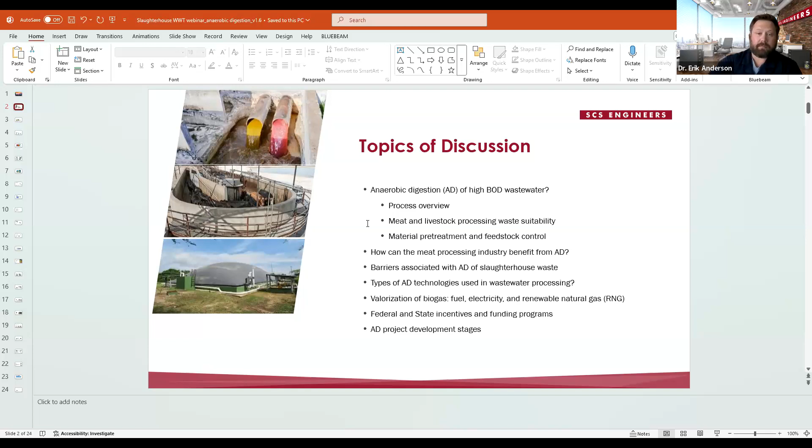First slide I have, anaerobic digestion. What is it? Let's just define it right out of the gate as a biological process where microorganisms break down organic matter. They do this without any oxygen present. It's inhibiting in this case, and the goal is that the organic matter in liquid phase turns into a gas.

This gas is very rich in methane and CO2. That gas is driven out of the liquid phase and above the liquid where it's captured. We're covering these systems so that there's no air or oxygen present. That gas is collected, pumped out of the system, and utilized some way for energy.

One thing to define here is the biological oxygen demand. This is a very common metric for wastewater treatment, and it ultimately says it's a measure of how much oxygen is consumed by microorganisms to decompose organic matter. It's a great measure of, A, what's your concentration of waste in your liquid stream, and there's also a measure of what's the biogas potential in that liquid stream.

There's lots of waste in this, pollutants that can't be converted to organic matter. They can't be converted to gas. It's either organic in nature but recalcitrant and can't be broken down, or it's inert but can be oxidized. So it's very critical to define what's in there and what's actually of value.

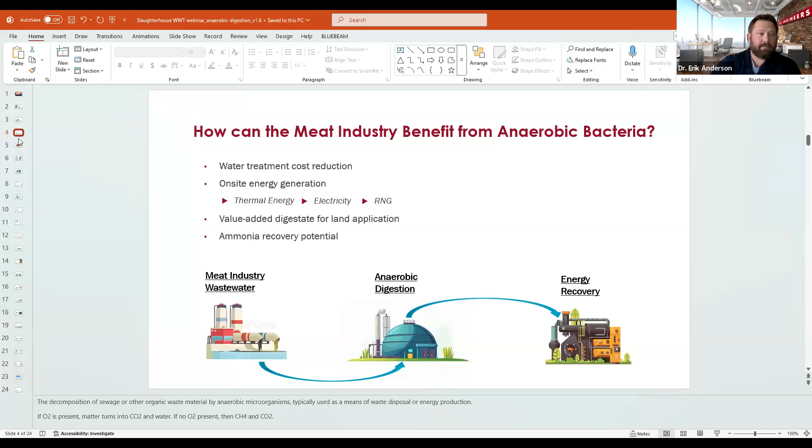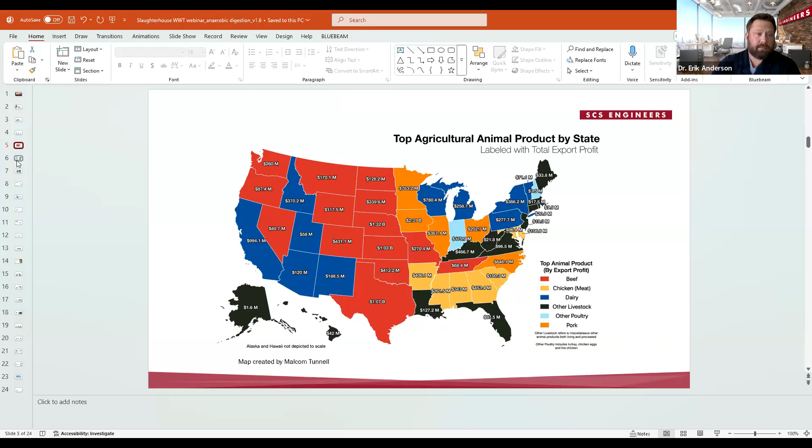Common meat processing streams. When we talk about the meat processing industry and livestock, there's a lot of different industries this topic touches on. It's any meat or processing industry dealing with a lot of meat, high protein, blood, protein derivatives, and high oil content from rendering operations. You can categorize into waste meat processing wastewater, like the wash-down water, the DAF or dissolved air flotation unit effluent, or in many cases the DAF solids that come off. If a system already had a DAF unit, depending on the chemicals used, we could retrofit in front of or behind that unit to target one of those streams. Both materials are prime organic concentrated streams that can be fed and broken down by anaerobic bacteria.

Paunch material - I've worked with facilities that had offtake agreements for their paunch material but were interested in processing it in a digester. That material is very thick and can be tough to deal with. It needs to be ground, pulverized, and processed in a way that can be fed into a digester.

Animal manures are obviously very popular, each bringing their own uniqueness in terms of design and processing. Chicken and pig manure are heavier in protein concentration and higher in nitrogen, which leads to ammonia, but dairy and beef cows can have the same issue. Waste oil collection, rendering operations, dead cow mortalities, meat and bone meal products, grease, and waste traps are all high in fats, oils, and grease. Although there's a limit to how much can be blended into a feedstock, it is very beneficial - we'll talk about the reasons for that later. Any industry with a high oil protein base in its processing, like food industries dealing with fryer material and fryer grease, often have a high BOD wastewater that needs to be dealt with.

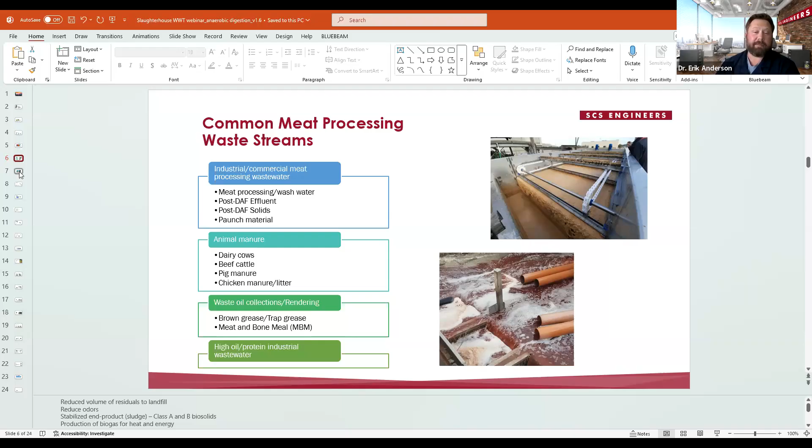To break it down, the total solids is everything that's not water. But within that solid content, there's degrees of usefulness. There's an inert portion that does not contribute to the biogas at all. It's mostly inorganic, can be organic, things like grit, dirt, windswept sand that's blown into fields or on farm manure, what have you.

Of the volatile components, there's total volatile solids, and then there's a portion within that called bioavailable volatile solids. What that means is not all organic material can be broken down in the time necessary for a digester to operate. That material can be cellulosic, bonds that aren't broken down within the design time, and they move through the process rather inertly.

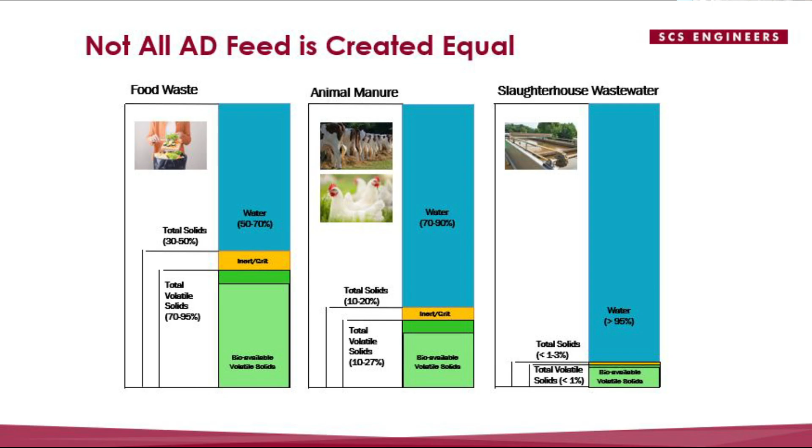These things, without design intention, can be problematic. They can be inhibiting agents, they can slow your production if not kill it, if left unchecked. The other major characteristic is the low total solid content, and the higher discharge temperatures. This is a very common industry characteristic of a lot of slaughterhouses, a lot of meat processing, that their wastewater might come out above 100 degrees Fahrenheit.

That can be a huge benefit. With that high temperature, you can get a high soluble degree of what's called chemical oxygen demand, or biological oxygen demand, BOD, that we talked about. This is essentially a measure of the amount of oxidizable material in solution.

The low inert content, you can see on the graph here that along with low total solids is a very low percentage of inert character, because the material comes from essentially cow organic matter, stomachs, meat and blood. There's not a whole lot of bone, not a whole lot of grit. These are systems contained within factories that are usually well regulated, so the only inorganic material would be from the animal processing plants themselves.

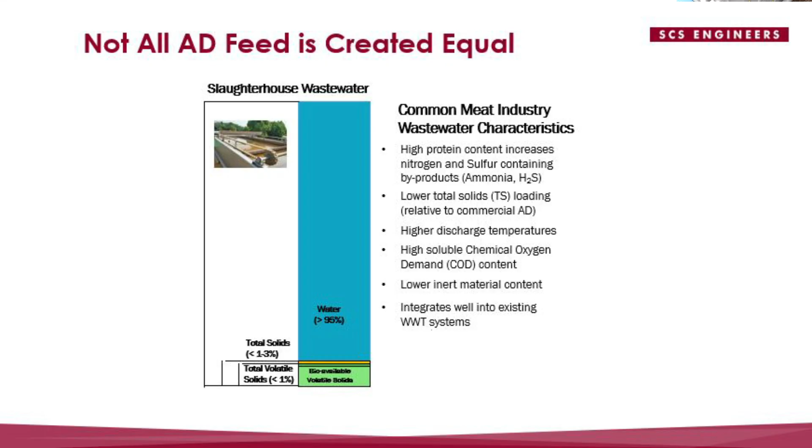Next are the barriers associated with the AD material. We can't talk about the positives without talking about the negatives. The high protein feed we talked about comes with negatives.

The ammonia concentration, if not dealt with, if it rises above a certain limit in steady state conditions—meaning the concentration in the digester at any one time rises above a certain threshold—the bacteria become less active, to a point where they become completely inactive. It's called inhibition.

The sulfur that comes in with the protein can also turn into hydrogen sulfide. Hydrogen sulfide is another inhibitory agent, both in the gas phase to the bacteria and in the liquid, but it also needs to be dealt with in the gas recovery stage. So once you pull that biogas out of the system, it needs to be removed before any processing, since it damages equipment for electricity generation, boilers, or RNG.

Salt concentrations can be a difficult issue and need to be addressed on a site-specific basis. Salt is used a lot in meat processing, both in storage and in the actual upfront processing, and then in cleaning afterwards with salt solutions.

These need to be addressed, especially with the logistics of a plant. This is one of the things in design—matching, say, an operating facility that only runs 12 hours a day, 5 days a week, with a 24-hour system. You need equilibrium, you need monitoring before feeding into these systems.

Salt and fats—the next point—high fat and oil concentrations both need to be understood: their logistical output from the facility and how to buffer those into a biological system.

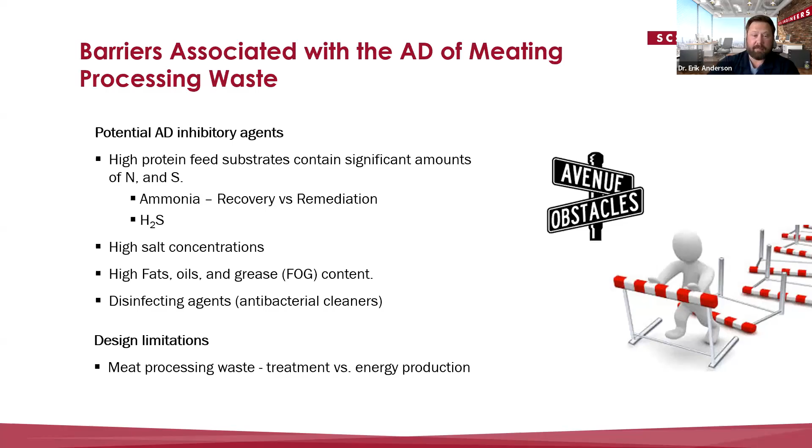I apologize—a lot of these slaughterhouses will have a day's processing contained in holding, and that manure gets trenched or collected and sent to wastewater as well.

Pre-treatment, specifically for this industry, involves some degree of maceration—grinding, chopper pumps into circulation—and EQ tanks, which again appear critical for this industry just to buffer out the operational highs and lows of the facility. That could relate to timing of CIPs, clean-in-place systems, disinfectant systems or schedules, but you want enough residence time in a holding system that can be mixed and homogenized.

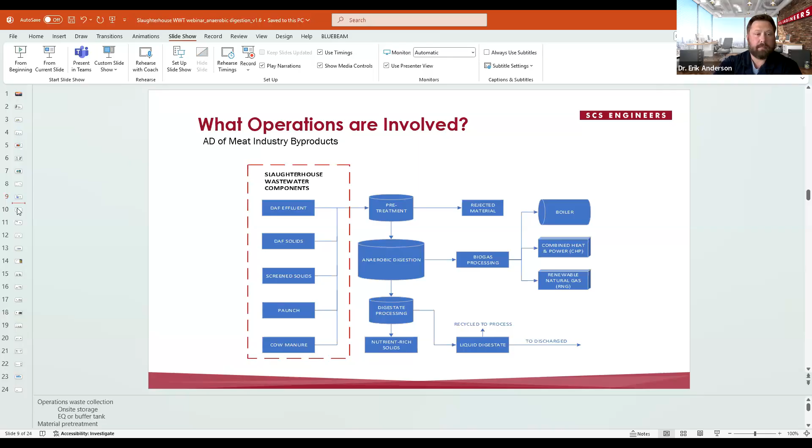Here, I won't spend too much time on it, but you can see on the left a general breakdown of the degradation pathway of large organic molecules. All human bodies, anything really organic, can be generalized into three categories: proteins, carbohydrates, and fats. And then there's inert materials. The combination of those together is what makes up living organisms. But you can make large projections and estimations based off chemistry and stoichiometry, based off the empirical formulas of that.

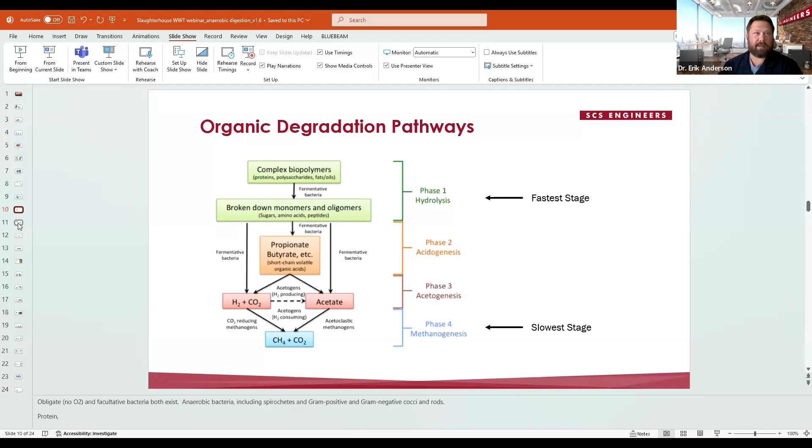So on the left, you can see these molecules break down into monomers, sugars, and acids, into intermediate compounds, then eventually methane. The big takeaway is that this first part, the breakdown, the one that we want to target during a pretreatment like thermal hydrolysis, is relatively the quickest to happen. The slowest is the last stage, converting these liquid phase acids and alcohols into methane, the molecule, the money molecule, the one that drives the process. So that is the slowest, and the one that all digesters are tailored to cater to. Everyone's trying to make that last stage, and those bacteria, as comfortable as possible.

I won't go into this too quickly, but on the left you can see a representative of a carbohydrate. Here is a representative of the backbone of a protein molecule. All proteins are just made up of repeating units of this linkage with a different R group. We won't get into the chemistry, but you can see that because nitrogen is part of that backbone, there's going to be a lot of nitrogen in a protein molecule. And fats and oils, these are the chemical symbols for a long chain fatty acid, and this is a monoglyceride. Again, these are just representative molecules of what these three contribute to the biogas population.

The big takeaway here is that a digester fed with pure carbohydrate would yield 50% methane and 50% CO2. A digester fed pure protein would yield 70% methane and 30% CO2, whereas one that just had pure fat and oil would be 68% methane. This is important because you want to be very intentional about the ratios of the feed composition.

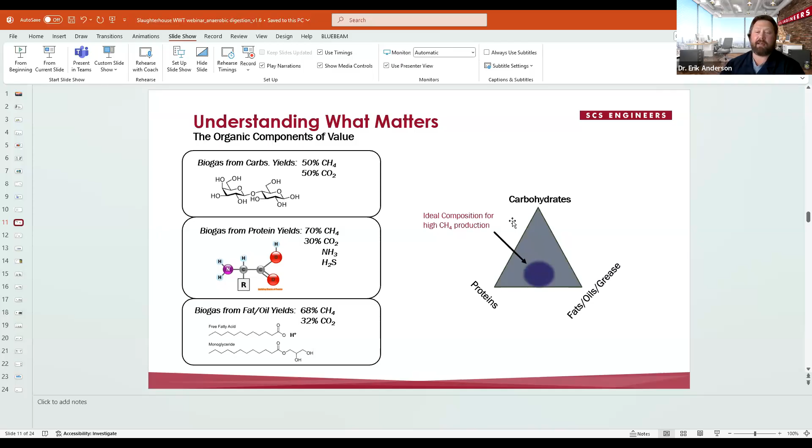Slaughterhouse material generally sits right around here. It's a great combination between fats and oils and proteins. We can get into the reason later about why you can't have too much fats and oils, or too much of any one thing, protein for another reason. But this combination, low in carbohydrate, yields the highest methane concentration of biogas in theory and practice.

What conditions do the bacteria like? They like pH right in the middle. They don't like to go too high or too low. Again, another good reason to use EQ tanks and buffering systems to feed into the anaerobic digester.

Temperatures. There are two temperature ranges, mesophilic and thermophilic, 35 and 55 degrees Celsius. The one thing I like people to take away is that there's a valley between those two - it's not that anything in between works, you want to be right at those temperatures, because if your control is off, or if you're shooting for higher temperatures and it cools, there is very clear activation energy involved.

It's called activation energy - the energy enzymes give to a reaction to reduce the energy it takes to complete it. But there's a clear valley here between the activation energy of some of these enzymes between these two temperatures, the critical enzymes in this reaction.

Organic loading rate is the concentration of the organic feed being fed to the digester. You don't want it to spike too low or too high - both are problematic. This is more reason for that EQ and that buffering tank, and again, monitoring and routine quality control.

Nutrients - there's a pretty critical ratio of carbon to nitrogen and carbon to phosphorus that should be maintained. VFA over alkalinity is another one. A lot of digesters just run on that alone - if they're in that range, they're fine. It's a buffer, an acidity and alkalinity buffer metric, but it's very important so that your digester doesn't go through large swings in pH.

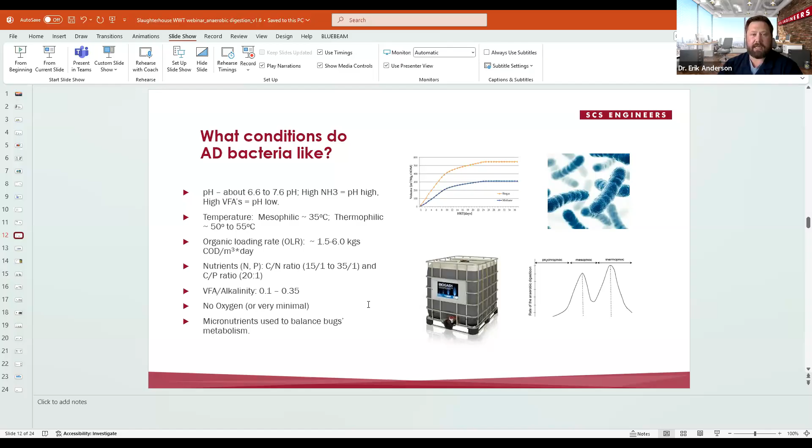No oxygen - that's obvious, but critical. And micronutrients - a lot of plants don't run on these, but they can be huge benefits for biogas producers. It's essentially bringing all the levels of these metals and micronutrients for the bugs that require it up to an even level. You test your material, see what you're off at, and there's a large number of companies here in the U.S. that will send you a recipe back that brings all levels up to ideal.

I think a lot of the reason for this webinar is to look at the options for a lot of these facilities to see if waste to energy is the right move.

Moving up from covered lagoons, you move into the CSTR, or complete mixed reactors. These are the very common above-ground large tank vessels seen in the Midwest, on farms, or paired with industrial facilities. They have the common bubble dome shape. They range anywhere from 500,000 gallons up to, I've seen, 5 million gallon digesters. I'm sure there are bigger ones, but above that is the plug flow digester - there's a lot on the market, and they're very useful for their range in the total solids in the waste feed. But again, that's very specific to the material you're using.

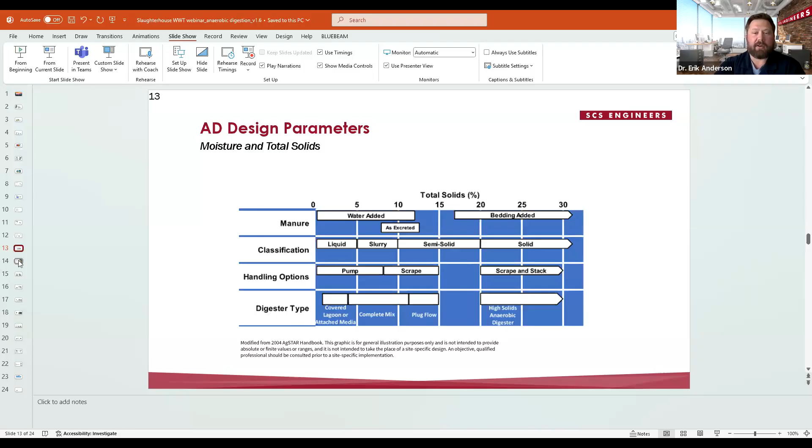And then above that, there's high solids anaerobic digestion, which has very little water - it's usually the material's innate character that's just being processed without additional water.

Now I'm going to talk about the potential for co-digestion. I think I've touched a little bit on the material coming out of these facilities. All facilities are different, but it has a tendency to be warm, very high in soluble BOD and COD, the material that's useful for converting to methane.

They already have water treatment systems, but the kicker, outside of the potential inhibition by ammonia that needs to be addressed, is that they're relatively low in total solids. If you build a digester to process this volume, you're sizing it for the volume processed on site, not for how much organics are in there. You get as much biogas as is a function of the organics coming from the facility. So if you clean up the water less, if you do less upfront, more will be sent to the digester, and you can make more gas.

But in theory, a digester at that same scale and size could hold a lot more organics. This is one of the things I think is very interesting. A lot of these systems I visited for slaughterhouses and meat industries flare the biogas because that's not the concern. But in the future, if there was more incentive from the federal and state side, these systems with a more hybridized design could produce a lot more biogas and handle a lot more waste.

So again, to improve digester chemistry, that's one reason to co-digest, boosting biogas potential. The chemistry, just to note, a lot of slaughterhouses deal with CP-CN ratios, carbon and phosphorus and nitrogen. Sometimes when you have that amount of nitrogen and protein coming in, you need more of a carbon source. So slaughterhouses can be co-digested with fats and oils from rendering facilities, but also energy crops, crop residues, bagasse, ground up. It requires some processing to get it into an easily digestible state, but that can help your chemistry.

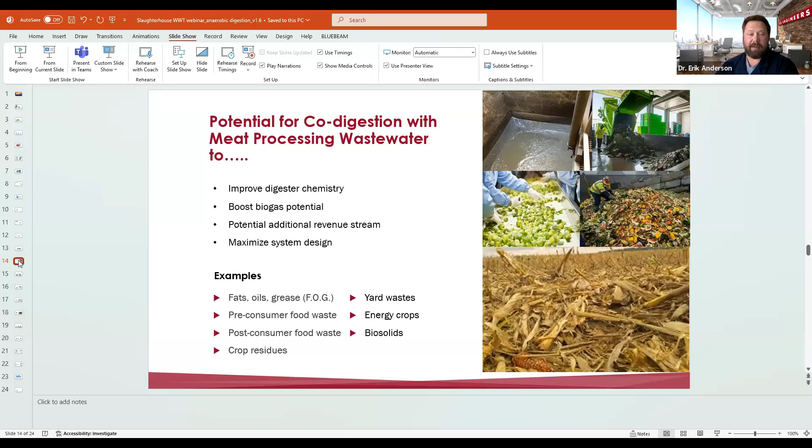Again, examples here: fats and oils, pre-consumer food waste, post-consumer food waste. These can often be great on paper because they bring in tipping fees—you're their waste remediation for a lot of these production facilities. Crop residues, yard wastes, energy crops. Biosolids is a trickier one; it's become legislatively prohibitive to land apply the end result of biosolid digestion. So that is trickier.

So here, now I'm going to walk into the two main technologies focused on for these water treatment facilities, and that's covered lagoon systems and CSTRs.

Here in the first one, you can see a covered anaerobic digestion lagoon on the left being built. This is a plastic membrane liner that covers the bottom. These can be anywhere from a single layer of membrane to dual membranes with a mesh gap in between. They've come a long way in their design, so they're not as leak prone. They have systems in place so that if a leak does form, any gas does not make large bubbles at the bottom, but can escape through pathways and be vented out through the sides.

Lagoons have come a long way, but I think the takeaway is that they're often not mixed. They're not designed with mixing or heating involved, and those are the two large design criteria to really push digestion to its limits—and when you do that, you push biogas formation to its limits. These are considered low-level technology, working with very low total solids concentrations. The HRTs can be very long sometimes because, without mixing or heating, the one variable they have is time and size. In theory, if cost weren't a factor, you can build these as large as you want. Eventually material will decay and decompose, and you will make methane, but at a higher cost and eventual cleanup costs as well.

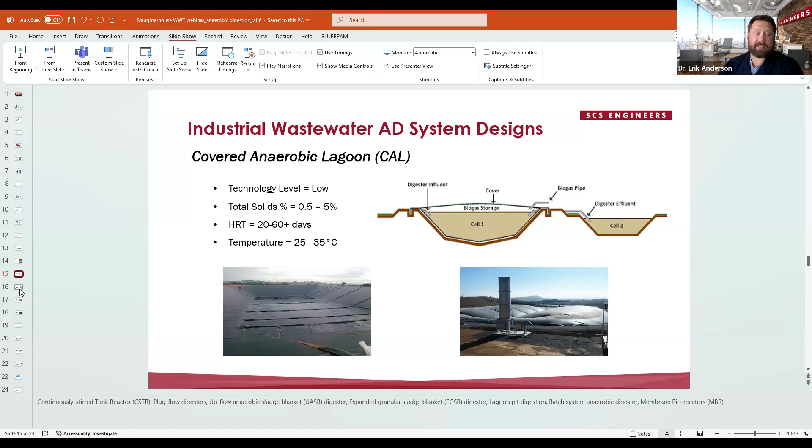And because they're not heated, they fall at ambient temperatures. On the right, you can see a photo of one operating under pressure, with the methane gas lifting off the liquid surface. You've got a flare system in front there. Flare systems are required anytime you've got gas, because even if you're producing energy or RNG, if something goes down, you have to shut down. You need a place to revert that gas to for flaring, because gas is always going to be produced—that's one thing you don't have control over.

Next slide, this shows a version of a continuously stirred tank reactor. You can see in the photo on the left—these are very common, you've more than likely seen them at farms as you drive through the countryside. These are considered medium-level technologies in that they have all the control you would see at higher-level versions, but they're more passive.

They can have... they're not as, what would be the word? There's not as heavy mixing involved here. It's more pump mixing, more mechanical mixing. It's not large, high amp motor mixing like a solids digester.

You can see on the right here a version of an eduction mixing system, where the material is sucked from one nozzle inside the tank and forced through small outlets called eductors, creating a shear force mixing. Here you can see a version of an internal mechanical mixer, which is just a prop like a boat. Above that is a version of an external heat exchanger.

The material is pumped from the inside through tubes on the outside of the reactor, and it goes through a counter current heat exchange, heating up the material and injecting it back into the system so that the entire liquid phase, when mixed, stays at one constant temperature. This mixing and heating is what allows these digesters to perform continuously through the seasons. It can be in the middle of Wisconsin during winter, but as long as it's insulated and heated properly, the performance should not fall down too significantly.

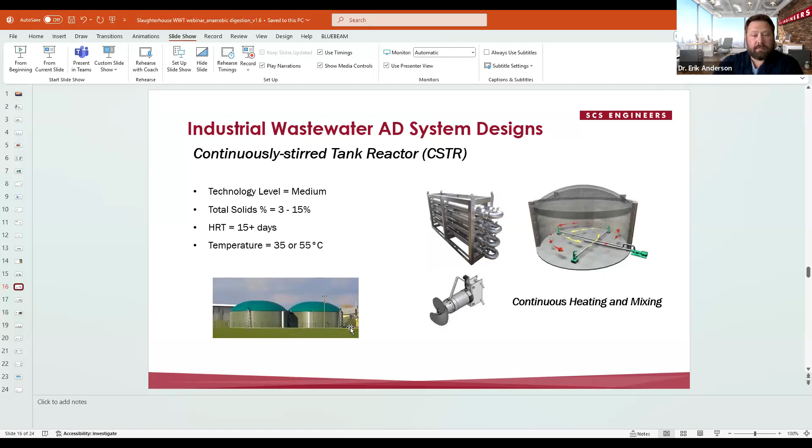Digestate processing: after you've done your digestion for X days in the digester, depending on the technology, you have to go through some type of separation stage for the material. You want to separate into a solid and a liquid phase, especially if you're going to recirculate that liquid phase back to the digester. When that's in the design, there is a lot of intention that goes into the concentration, sometimes called solids retention time.

There's hydraulic retention time and solids retention time. The hydraulic is just the amount of time the water spends in there. The solids, depending on how you screen and concentrate it once you leave it, can be recycled back to a degree to increase breakdown and digestion. It essentially increases the amount of time solid material spends inside the digester, which you can play with to increase your gas production. But everything comes with a cost—in that case, it would be pumps running at higher speeds more often.

In the first stages, there's a whole number of options and technologies associated with organics removal: screening, clarifiers, hydrocyclones, centrifuges and decanters, coagulation, flocculation, all the way to drying once you've got it separated.

There's biological treatments post-separation that you can use to treat the water: waste stabilization lagoons, trickling filters, rotating biological contactors, activated sludge systems. Depending on the end use and end goal—where this wastewater is going to—that will dictate the degree of treatment post anaerobic digestion. But again, the takeaway is there's a coarse and a potential fine treatment stage. Coarse would just be the physical screening, and then you'd move into fines treatment.

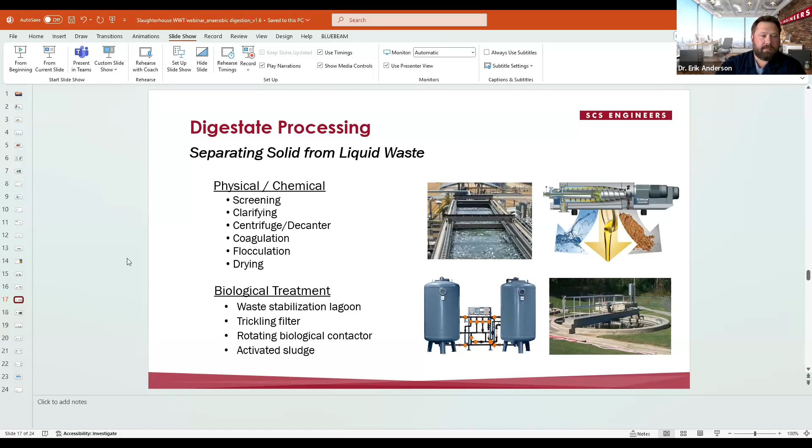Value-added waste streams: now that you've got these two streams separated—your roughly 28% total solids digestate, plus or minus depending on the degree of treatment, and your water—what do you do with them? The solids are very commonly used as a nutrient-rich solid, as a fertilizer or soil amendment. In the case of dairy farms that aren't using sand bedding but are using animal or hay bedding, that material is often dried and recycled back as bedding for the cows, supplementing additional new material being purchased. The water itself is recycled mostly back to the AD process.

That's a very common design desire. It reduces your well water usage and treatment of that well water, keeping things in kind of the circular economy as much as possible. The water isn't as concentrated in nutrients as the solids portion, but there's absolutely soluble nutrients in there. And if you can partner with a nearby field, that's best, because travel is ultimately a barrier with anaerobic digestion.

You want to limit the amount of travel and time the material spends to get to the facility, but also you don't want to send it away any distance, because that takes away from the benefits of the circular economy. If there's a local farm, if this is on a farm, you want to make every effort to keep this used and in-house. And then the last option would be sewer discharge to a local POTW.

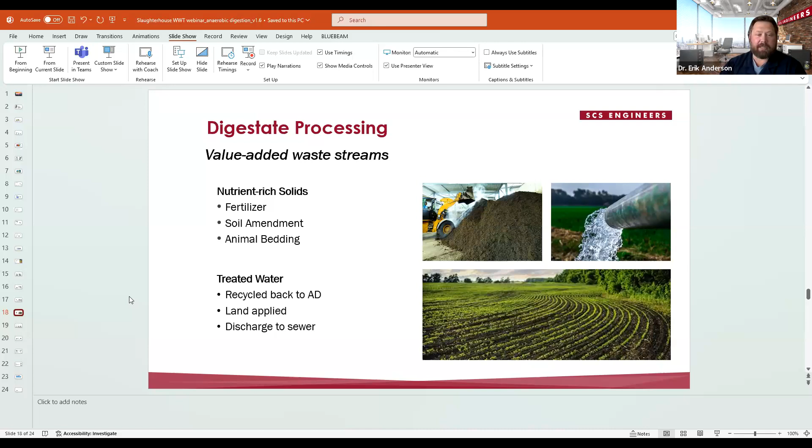So now we come to the biogas. We've talked about the digestate, what to do with the liquid and solid portion. What do we do with the gas? As I mentioned, commonly right now, a lot of these lagoon systems at slaughterhouses will just be flaring their biogas. The low-hanging fruit would be thermal energy.

If this was an animation, that would be the only one showing right now. But thermal energy essentially is retrofitting their boiler to be able to co-generate heat off of natural gas and methane, which is natural gas, just not cleaned up to the degree that's coming out of your stove.

This has a lot of benefit, and there is legislation coming through the pipe - I don't know enough about it, but there's a thermal credit coming online that I think is going to be a real benefit to a lot of these operations. If they can factor in this thermal credit, offset their natural gas usage, and get a thermal credit from the government, it may be much more attractive in the future to pay for some of these systems. So cogen in the boiler.

The other option, combined heat and power. This is actually an electricity generation method, but one of the byproducts of electricity generation is a lot of thermal energy. So when these CHP systems come online, you're generating electricity and you're also generating thermal energy. I've seen examples of this where that thermal energy is completely dedicated to the heating of the AD material going into the system. They don't even bother using that heat back into the plant - they keep it outside near the digester, and just exchange that, economize that with incoming water.

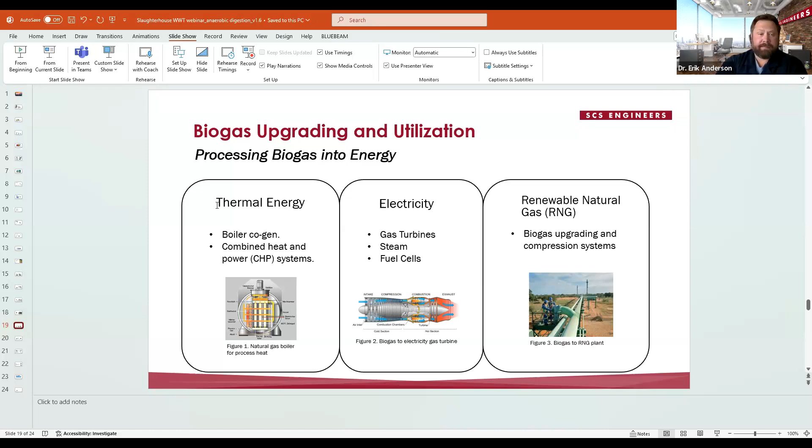Biogas upgrading and utilization - just touching on that renewable natural gas, because again, these are the bigger systems. These are the large slaughterhouse operations, the multi-hub-and-spoke models that could draw from multiple facilities that have this potential. You can see in the corner here an image of a small upgrading treatment system.

A lot of these incorporate several technologies: pressure separation or membrane separation for CO2 separation, pressure swing adsorption for nitrogen separation, amine scrubbing, water washing for particulate, H2S removal. They may require an iron sponge. But ultimately, the takeaway is that it's not just one thing to get this to renewable natural gas stages. There's multiple technologies that require monitoring and telemetry, so these systems can be costly. So there is a limit to them.

They need to be cleaned up. RNG quality is usually around 98% methane - absolutely no O2, nothing in there that could oxidize or degrade the pipeline. Because again, the U.S. has thousands of miles of pipeline, and they can't afford to have any of it damaged by poor quality gas. But again, there's a very profitable, very large industry here in the U.S. - renewable natural gas.

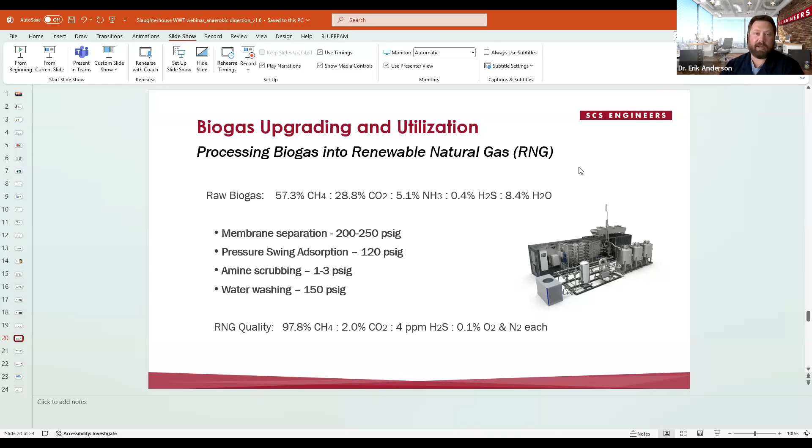So, federal incentives. I'm going to finish up the presentation today by talking a little bit about the current federal incentives, state, and other opportunities for funding this work. Admittedly, the first part of this year has not been great for renewable energy. There's been a lot of things administratively, out of my control, that haven't spurred it. But traditionally, the last 10 years have been terrific.

There's been a huge amount of anaerobic digestion coming onto the market in the last 5 or 6 years. I'm not sure when the investment tax credit came out, but that was a huge boon, offering up to 30, sometimes up to 50%, based on eligibility, of CapEx costs for installing anaerobic digestion systems. That has recently changed - the legislation has changed on that. I don't know where it currently stands and what percentage, but I'm a big advocate that it gets replaced or reinstated.

The production tax credit: if you're producing electricity from a renewable source like biogas, they give you a tax credit per kilowatt hour. The renewable fuel standard mandates the use of renewable fuels and biogas for transportation use. The Rural Energy for America program is a very popular grant and loan system for rural systems and industry, commercial entities to apply for AD systems, and for farms, AD systems as well. The clean fuel production credit, again, is if you're able to produce biogas for sale as a transportation fuel. I don't know where these credits are in price or percentage of the project, but I see them accounted for in almost every financial pro forma I go through, and they are a considerable part of the revenue streams when accounted for. There's also the Biomass Crop Assistance Program and the Inflation Reduction Act.

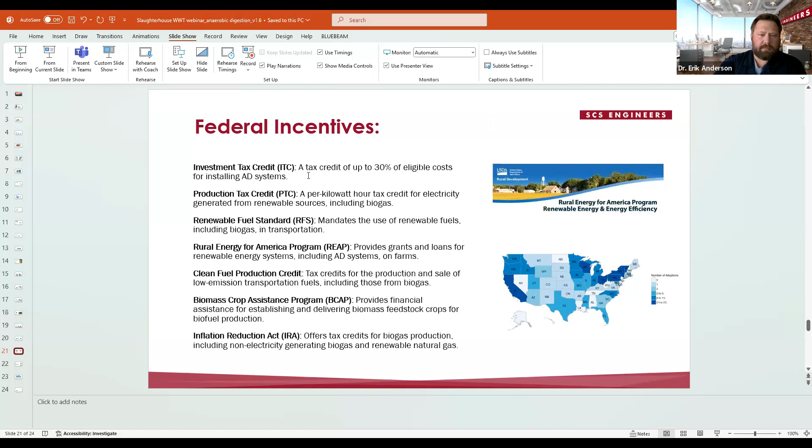State incentives: the Low Carbon Fuel Standard in California has been a terrific program, helping a lot of industry grow there. Because of its success, there's a lot of states looking to adopt a similar model program. I know Minnesota, Washington, and a few others I'm forgetting, but it would be terrific if that spread as well. Renewable energy certificates - certain states have portfolio standards that require RECs being traded for compliance. For certain industries, renewable identification numbers can be purchased and sold, similar to carbon credits or carbon offset credits, which we'll talk about.

Grants and cost sharing: many states offer grants and cost sharing programs to support anaerobic digestion specifically. Tax exemptions - some states offer these for land purchasing or AD systems. Net metering allows small-scale biogas producers to sell excess electricity back to the grid. And then, non-state but other incentives, there's the carbon offset credit, a voluntary market for trading carbon credits that can be generated from biogas production, and lots of different financing options I've seen, from grants, cash reimbursements, and loan guarantees available out there.

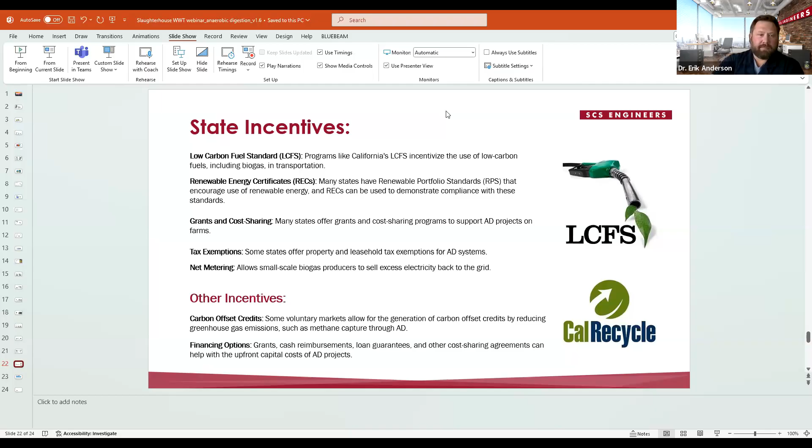My last slide is just on the general stages of future AD project development. If a facility is interested, how do you understand whether you are right for this? If AD is right for you, where's the cost benefit? The first thing is a feasibility study to look at the logistics, look at the size, and look at the equipment that would, at a high level, be involved to integrate that waste stream into an anaerobic digester.

I am a big believer that this always needs to be paired with material testing and pilot scale testing, if time allows. There's no certainty in taking values from publication that your material is like the material that was tested at one time. Trust me, I've done so many lab scale BMP and pilot scale testing for AD that it's really hard to recreate it from the same material sometimes, let alone just taking it from publication because it's similarly typed. So you really want to be using empirically derived test data in your projections.

Especially with something like slaughterhouse and commercial industry processing facilities, where timing doesn't necessarily match up with a 24/7 operating digester, you need to make sure that in the middle of winter, your production is as expected versus right after a CIP event or right after some type of logistic anomaly. That is always critical. Once you've done your material testing, you feed that back into your feasibility study and your economic model for refined economic modeling. And once you have all that done, and everything's cleared, then you can move into engineering design.

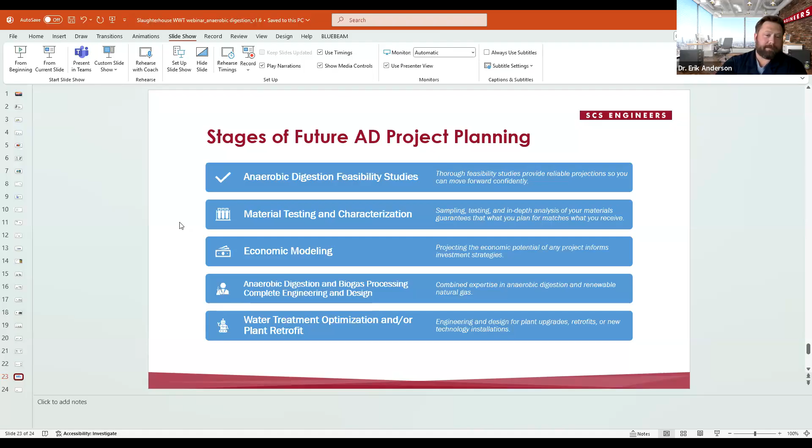What are your thoughts on managing long chain fatty acids to maintain digester stability and keep the biogas production up? So fats, oils, and grease, long chain fatty acids, are really great for making biogas, but they can be inhibitory, even toxic to a point. So at least understanding the innate composition, and if there's a co-digester situation where you can bring in additional ones, it's understanding the highest concentration possible during that feed. If you've got co-digestion, it's about controlling the feed of that material into your influent feed. Monitoring that with some type of position control valve or PLC, so you don't feed more than X pounds or percentage of pounds relative to what's gone into your system that day. With telemetry and control, that can be dealt with very easily, so you stay at that high organic feed level.

In between, keeping everything in between the waves.

Could you work with multiple substrates during a feasibility study? Yeah, absolutely, especially if the facility has multiple byproducts. So they've got a DAF on site and don't know if they can use the DAF solids because of the chemical they're using in their DAF. What we've done traditionally is test everything on site - everything being produced from the DAF solids, the effluent. You do a BMP test to see its potential for biomethane. If it's there, you run into pilot scale testing, because you don't see inhibition in BMP testing, just biogas potential. The inhibitors are diluted out in the methodology. You actually need to feed a digester continuously to see what the actual steady state levels of these inhibitors are. That's why, based off early characterization of all those different streams, you'd absolutely want to do as much parallel testing with different substrates.